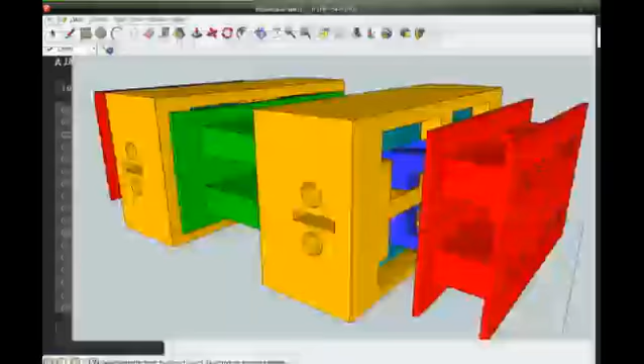I wanted to do this last year, but it was a bit hard to explain. I can insert magnets while it's running, and I'm going to 3D print this because it won't take long to knock out.

Well, I'll record this anyway for Alan tomorrow if he gets it. I can insert ferrite rods, which I've got some 5mm ones, into these holes and attenuate to make adjustments on the laminations, or use a piece of steel rod to adjust the air gap for tuning.

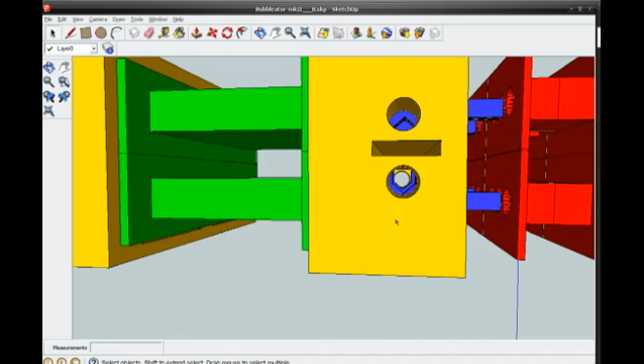So that goes right in between the rods. If I just hide that a minute - right, so there's my laminations coming through, actuated by the mk2 coils over here on the right, in red. That's why I colour coded everything, to make it easier to explain.

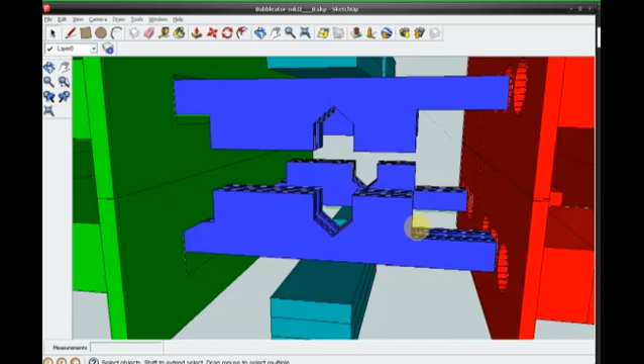My existing laminations, I originally designed them to go inside the bobbins. But with the alnicos being inside the bobbins, I can't exactly put them in there. So I'm considering cutting some off, since I've got plenty. I was thinking about cutting part of this down so I can get the coils a bit closer, because the closer they are to this magnetic switch, the better.

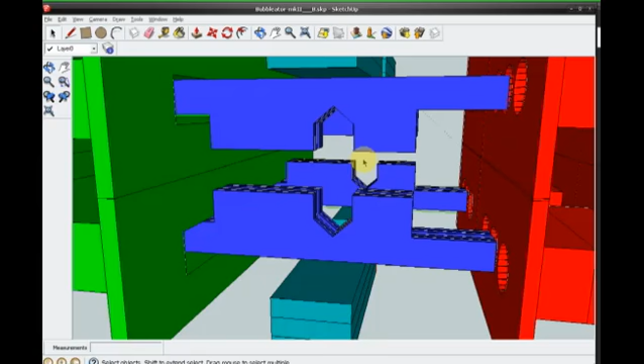So I'll probably do a little test at some point when I get these parts 3D printed. These things at the bottom are magnets, and these are the steel laminations. Obviously I don't need to print those because they're in steel, but I basically tried to model all of it so you could see how it would go together.

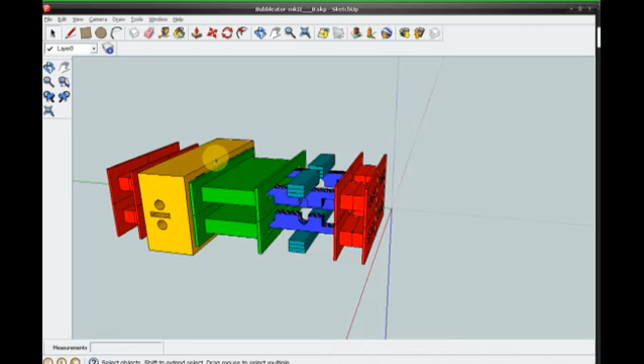I've got a bit better at doing it now. I would have to 3D print these secondary coils, colour coded green, and there's two coil secondary windings on there. These can be daisy chained. The idea is, if one of these works well, I could daisy chain it. So I'll unhide that.

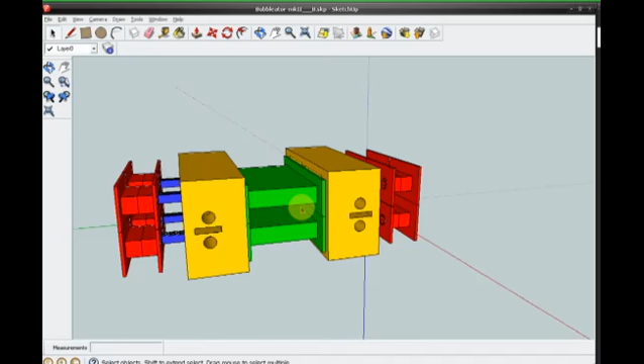What I mean is they can be stacked, so these actuator coils here would drive another section of laminations and another alnico magnet, then another set of coils, then another magnet. This is where the magnets are, inside. So if I hide it again - there's the magnets. We could have a string of them and stand it up on the floor. That's the idea.

So anyway, at the moment, that's all I've got really.

But my other build, there's nothing wrong with it as such, it's just the couplings are a bit too loose, and I can't change things while it's running because there's no easy way of changing out the cores. I've thought about drilling holes through there, but I just thought rather than doing all that, it'd be a lot easier to make this one, which I thought about doing last year.

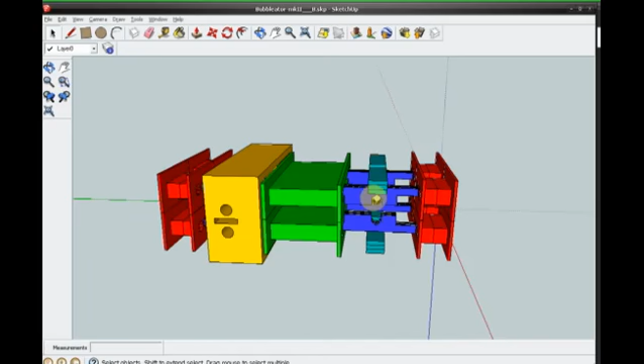Which would be a lot simpler to 3D print and basically work in 2 dimensions instead of 3, and I can have 8 coils running directly on the laminations instead of at an angle, because it's less efficient at an angle. That's the problem I found, because I'm trying to get magnetic fields to go around a corner. It's better if I have it like this, really.

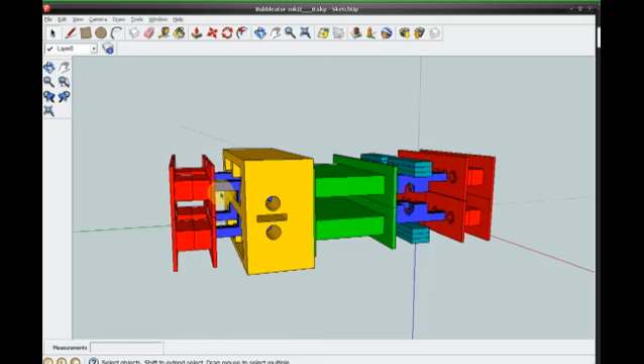Anyway, so that's basically where I am at the moment. And then there's my secondary coil, where the laminations come through, and the magnets are inside here, at the top.

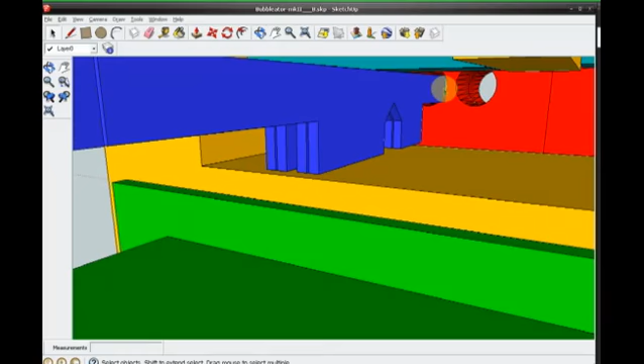These things here, there'll be one magnet and some two spacers, or I could put two magnets and one spacer. It depends what I want to do, how much power I've got to drive it. The more magnets in here, the more power you need to put in, but then the more you get out. So if you haven't got much power to begin with, then one magnet's probably enough, because these neodymiums are very strong.

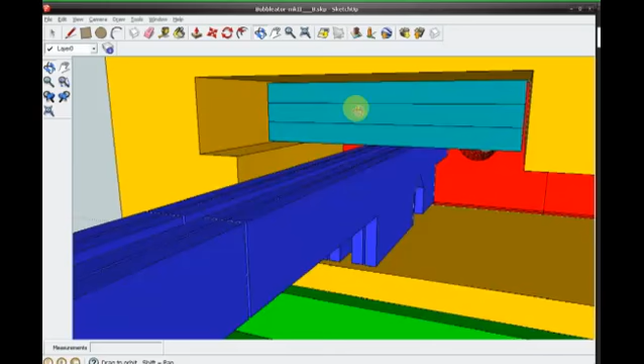So I'm not going to be putting a lot of magnets in to begin with. I'm just going to start small and we'll build it up. Now at some point I'll make it so that these magnets can also be removed from the side.

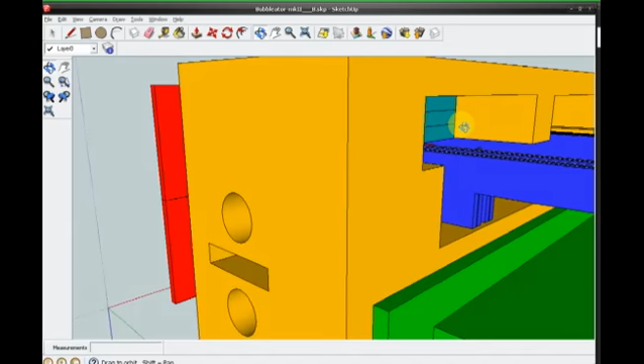I haven't made a hole yet, but I was thinking about it, and it might actually be practical to make some rectangular holes in the side here, so that these magnets can be slid in and slid out, like on a little drawer thing. So yeah, I was thinking about that.

I've already made some holes for the other things, and it makes sense to make a drawer where I can just insert the magnets and push them in, pull them out and change things, and it's a lot easier than taking the whole thing apart.

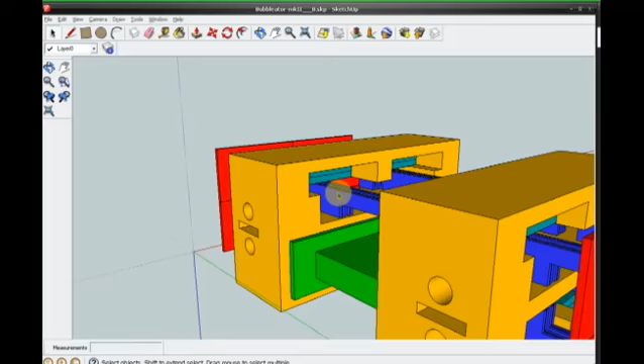So anyway, let's see - hide that one as well. The other one, the bottom section, is basically a mirror image of the top, you see what I mean? So I will just select these two and hide those as well. You'll get an idea how the physical part is in the interior, and that's basically all there is to it, really.